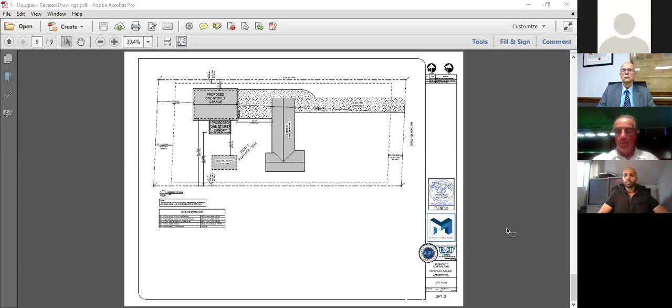Trevor Douglas: My address is 6644 Forestell Road, Guelph. My application is for a shop to be built in the rear corner of my property. I need a variance on the height of the roof to 9 meters as opposed to 5. The reason for this is I've got an RV that's 11 or 12 feet tall, so I need the extra height to park it inside, and that's why I need the variance.

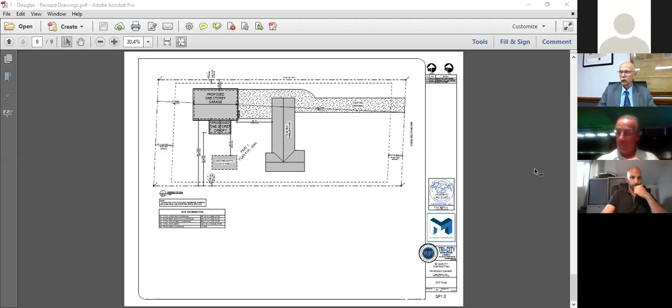Okay, I'll ask members of the public. Lena, are there any registrants who requested to speak? No, I did not receive any requests. Then I'll ask Courtney, would you please advise if there are any attendees watching the hearing who would like to provide comments or ask questions with respect to the application? There's no attendees present looking to speak. Great, thank you. So we'll now turn it over to the committee.

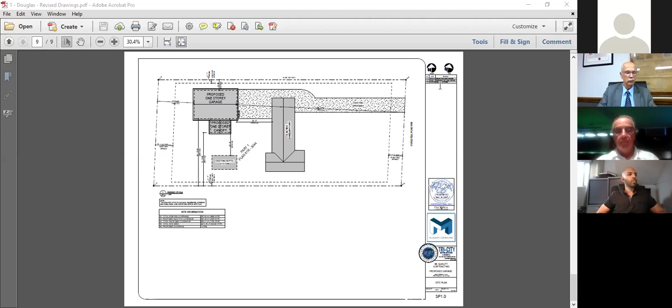I'll ask each committee member in turn with respect to any questions or comments they may have of the applicant or the county planner. Dan? No, I'm fine with this, John.

Okay, Dennis? Just the height, that seems like a lot more than 11 feet that we're adding there. Is that the minimum you go? Yeah, I've got a 16-foot interior ceiling for a 14-foot garage door. I'm just going a little bigger because we do plan on buying a larger RV, like more of a diesel pusher in about 2 or 3 years, so I'm just sort of planning for that down the road. Right now I've got a C-class RV, but I will be upgrading in a few years, so I'm just sort of planning ahead.

Okay, thanks. Deep? Yes, I have a question regarding the canopy that's attached to the garage. Will that be connected to well or septic system for the water, for the bar, or no? No. There will be water run to it, yes. But just for a small hand wash sink. Oh, okay. Yeah, no, I'm good.

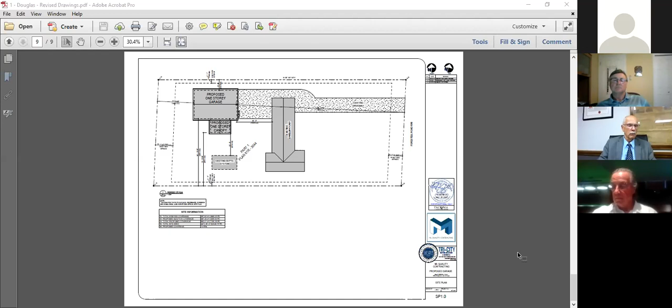I know, actually, one more question. Access to the garage, or sorry, the shop - will you be cutting any trees from the side of the driveway? No. Okay, that's it. Paul? Yeah, just with regards to Dennis's question on the height, Trevor, I was just looking at it, it comes to about 29 feet at the peak.

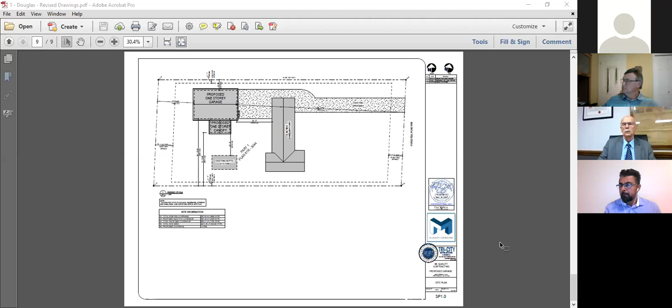Was there any thought process maybe for a different design to minimize that? Like, I guess your 12 feet was your RV now, what would the new RV be? The new one would probably be closer to 13 feet, and we're going to go with a 14-foot square door just for that reason. As for the design, I just sort of left this up to the engineer. We gave him some parameters size-wise for what we wanted with the width and length of the shop, and this is what he recommended as per code. So we're just going based on his recommendations for height with the rise and run of the roof, if that makes sense.

Any other questions, Paul? Paul? John, sorry, I lost the connection there. I got cut off there. Okay, any other questions, Paul? Nope, that's it. Okay, did you hear my reasoning for that? I didn't know if I got cut off, if you heard me or not.

Yeah, actually I didn't hear. If you don't mind, just quickly going over that one more time. That'd be great. Yeah, like the engineer who drew this up, we just told him we gave him a footprint of the shop, 40 by 60, and we told him we wanted a 16-foot interior ceiling. So this is what he drew based on building code. So we're just going with what he recommended. Okay.

Thank you. Thanks. Okay, I have one question. The concern is that this might be used in the future for commercial industrial use, and we're going to be asking you, as part of the conditions, to provide a letter confirming that there will not be any commercial industrial use of the structure. That's fine, that's not going to happen. It's just a shop for storage. Okay.

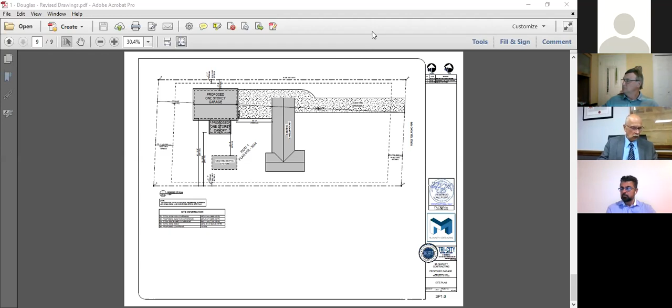In the matter of Section 45 of the Planning Act as amended, being a new comprehensive zoning bylaw 023-2018 as amended, an application for a minor variance permission to allow one requesting relief of comprehensive zoning bylaw 23-2018 as amended to permit a maximum height of an accessory structure to be 9.02 meters to the peak of the roof instead of 5 meters as required, requesting relief of comprehensive zoning bylaw 23-2018 as amended to permit a maximum lot coverage accessory structure to be 5.1 instead of 5% as required. So may I have a mover and a seconder for this wording?

Dennis? Moved. Second, Dan? So now we will vote on the application. As I call out your name, state either approved, denied, or deferred.

Dan? Approved. Dennis? Approved. Deep? Approved. Paul? Approved. Approved, and I vote approved as well.

So Lena, we don't have to read the final vote. It's all approved. So let's move to the second minor variance application. For the information of the applicant, it's approved subject to a 20-day appeal period.

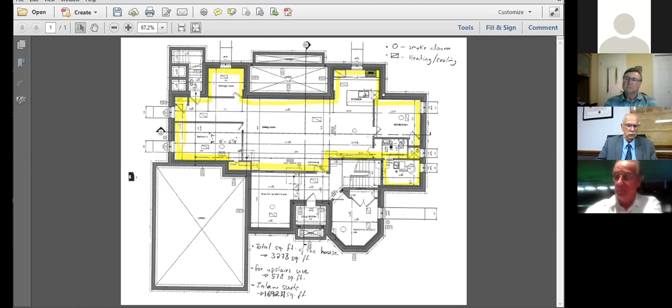I'm okay with it right now. Deep? I'm good with this as well. Paul? I'm also okay. Okay, I just have a question. Has this been constructed already and the building department has gone through it, or are you waiting for a minor variance before you make the application to the building department?

The house has been built, but the basement is all open. So I'm waiting for the variance in order to start construction of the basement, putting in the walls and everything. Okay, so the question is, have these drawings been forwarded to the building department for approval? From what I was told, I have to wait for the variance. So the initial drawings have been approved, yes. When I was building the house, they had approved the blueprints. The house is about 2 years old.

Now, in regards to the basement, for the basement apartment, they are not approved, because they had to wait for the variance to go through before I can apply for the permit. Okay, if that's what your question is. Yeah, that's my question. So what I would propose is that we put a condition on the minor variance that's subject to receiving a building permit for the facility.

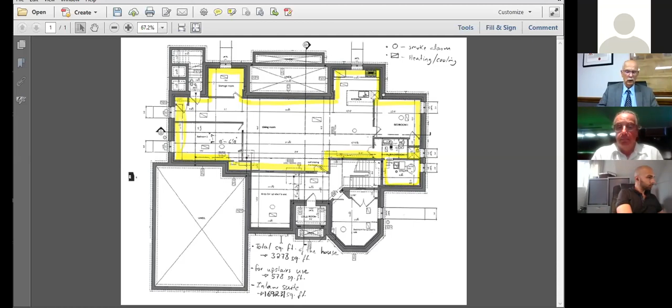Any other members of the committee have comments with respect to that suggested condition? I think that's fine, Mr. Chair, as long as I assume the building code would cover fire code. Yes, it would. The construction has to meet the regulations of the building code, and all the necessary points you raised would have to be covered off. Okay, great. Lynn, can you read the condition that we're proposing? The condition is that the minor variance would be subject to receiving a building permit for the construction of the basement. Okay, fair enough. All right, so what I'll do now is read the document.

In the matter of Section 45 of the Planning Act as amended, a new comprehensive zoning bylaw number 23-2018 as amended, and an application for a variance requesting relief from provisions of comprehensive zoning bylaw 23-2018 as amended to permit a maximum floor area of 52% as required. It's approved with the condition that the construction receives the necessary building permit.

So do I have a mover and a seconder to accept this wording? Yes. Paul? Mover, second. Deep? So I'll call your names and please indicate whether you approve, deny, or defer. Dan? Approve. Dennis? Approve. Deep? Approved. Paul? Paul? Approve. Okay, and I approve as well.

So Roman, this will be subject to a 20-day appeal period. Okay, great. So that's it for the minor variance applications. So the next item is item 5, other matters. We have no item 5. The next is adjournment of the Committee of Adjustment at 7:23.

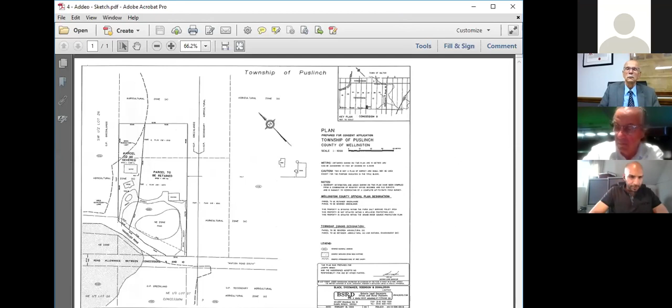We were working with the Grand River Conservation Authority and the county as there was a requirement to provide an environmental report because of the natural heritage features across the road and the regulated area to the north of the property. We've provided that information to the Conservation Authority and they are supportive of the proposed severance. We also have one barn within the MDS calculated area, which we provided the farm data sheets to the county, and they're satisfied with the separation that's required.

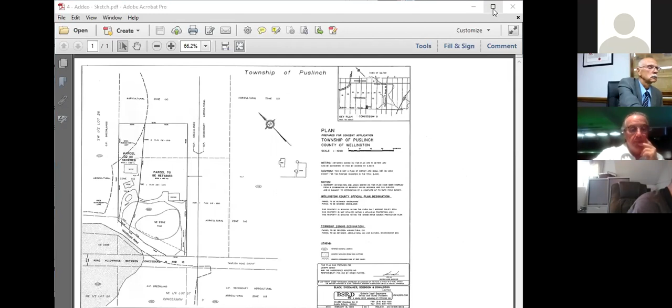Your road inspector has been to the site and has reviewed the proposed entrance, which we're showing at the southerly corner of the property. With the removal of a few trees and shrubs in that area, he's saying that access is acceptable. I'd be pleased to answer any questions.

Okay, then I'll ask, Lynn, were there any registrants to speak? No, we did not receive any. Lynn, were there also any agency comments received? The township did not receive any comments. Okay, very good.

Well, let's move into comments by members of the committee or questions. Dan? No, I've got nothing on this one. Dennis? Yeah, the minimum distance separation, you have an unoccupied barn, but it has the capacity to hold animals. So do you not need to fill out what the potential animal units are for that barn? It doesn't look like the MDS is done correctly.

Through you, Mr. Chairman, what the county has requested is that the owner of that barn fill out his farm data sheet, which shows the size of the facility. My understanding is the county does the calculation of the MDS based on the farm data sheet. In their comments to land division, which we received ahead of time because of the timing of this project and COVID, in response to not having Puslinch's response, they did prepare a report for land division, and they've said that the MDS 1 requirements are met with the proposed severance.

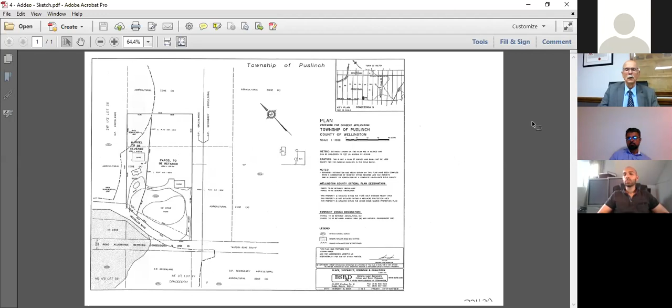Somewhat, but why does the building have to— like, he wants to keep that building as well as build his house as a storage facility? That's the rules that we have in place.

So the intent, my understanding of the intent, is that somebody might do the severance and just leave that building on their property and let it basically become a derelict building and not do anything about it. So there's a date put on when the building has to be either used or demolished, and once that's exceeded, you can always ask for an extension if you have mitigating circumstances. But certainly, we do not want any buildings that would become derelict and staying on the severed piece.

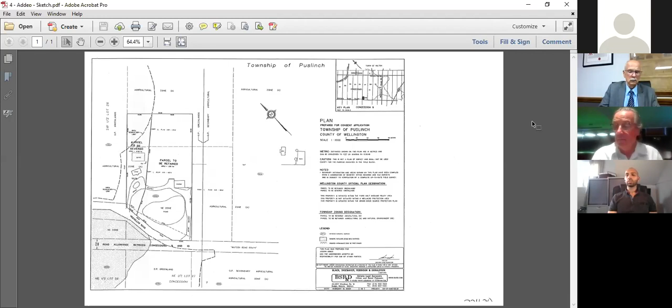Okay, so what I heard you say is that building can continue to be there as long as he's building a house or redeveloping that building as part of his house. As long as the house is there, he doesn't necessarily have to demolish it, but he has to build a house. Correct. The intent is not to have the property vacant and have a building there that's not fit for purpose of a residential home, and then it just goes to waste. Okay, I understand. Thank you.

So I assume, Nancy, if you want, you can contact Lynn and she can give you a copy of the agreement. You can advise your client appropriately. Thank you. Okay, so what I've heard is a suggestion that the committee has...

MDS calculations should be provided. There was concern about the GRCA by several committee members, and I'll just say that conditions to be subject to meeting GRCA requirements. And thirdly, notice that the retained parcel will require a minor variance.

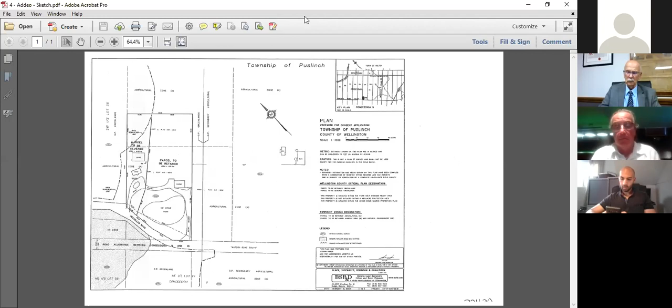Okay, great. So do I have a mover and a seconder for these suggested comments?

Dan, moved. Second, Dennis. Great, and we'll go around the table.

Dan? Approve. Dennis? Approved. Deep? Approved. Paul? Approved. And I approve as well.

Thank you. Moving on to severance application 12B, B27-20, also known as D10-HAR, George and Dorothy Harris, Part Lot 27, Concession 1, Puslinch. Proposed severance is 45.2 meter frontage by 148 meters or 0.66 hectares, existing and proposed rural residential use with existing house, detached garage, Quonset hut, swimming pool, and storage building. Retained parcel is 12.3 hectares with 19.3 meter frontage, existing vacant land with tile field for proposed rural residential use.

Lynn, are there any agency comments? If so, could you please read them? No, we did not receive any comments from the agencies or township departments.

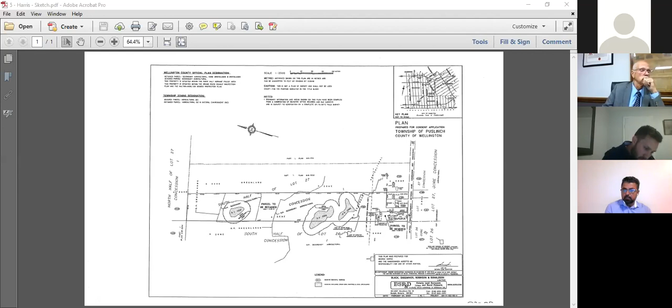I expect it will be down towards where the Quonset hut is.

Does my arrow show up on your screen? No. Okay, so there's the house and the pool, and then in behind is a Quonset hut, and I expect it will be in that area.

But in saying that, it's actually the GRCA saying they have no regulations in this area, and it's the Hamilton Conservation Authority that does, so I had to go back and forth between these two authorities, because while our mapping shows one thing, the GRCA claims they have no concerns in this area. So then we ended up at the Hamilton Conservation Authority, and they indicated they didn't have any jurisdiction here either. So both of them said they didn't have any concerns with the application.

Okay. Yeah, my concern was only with the GRCA and the regulations.

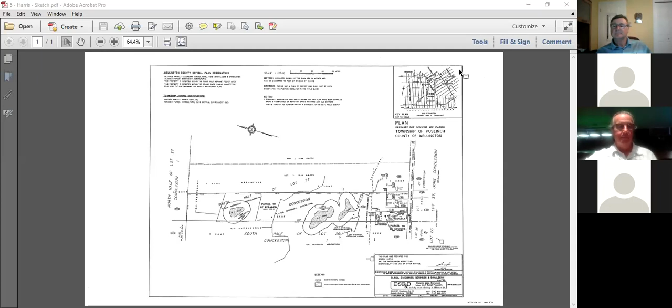Anything else, Deep? No. Paul? Did we lose Paul again? Paul? He might have got kicked out. I don't see him on the list. Oh, there he's coming back in. Hi, Paul. Paul? Yeah. Paul, perhaps maybe you can kill your video, that would take up less bandwidth. You might not lose us when you wish to speak. Sure, sorry about that, guys.

So Paul, I'm going around the table asking if anybody has questions. I don't know if you heard Dan Kennedy's question with respect to the tile and the response that it will have to be relocated from the future driveway location. Dennis asked with respect to the MDS calculations, and I asked Zach, our planner, and he indicated they'll see if they can provide it in the future. And Deep asked with respect to GRCA, and Nancy advised that neither Hamilton nor the GRCA are saying they have jurisdiction in this area, but somebody obviously has to because of wetlands and the natural zone. But they'll come out, I'm sure, down at the Land Division Committee. So Paul, do you have any questions?

No, I do not. Thank you.

Okay, Nancy, first of all, we're going to require a minor variance for the width of the frontage on the road. My concern is with respect to the location of the house relative to the other two homes and the future, whoever the future owner is, of the home that's going to be severed. Has there been any discussions with the homeowners of the other two homes?

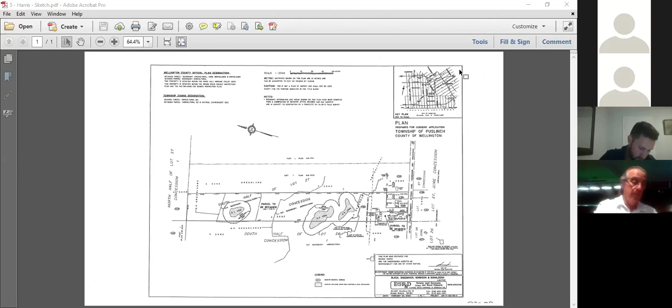No, at this point, the two that have been carved off previously, that's correct. I don't believe, actually, I shouldn't say that. I know that at one point Mr. Harris approached the adjacent owners to see if they wanted any additional lands to the rear of their lots, and they indicated they weren't interested. That's probably the only conversation other than him advising them that he is doing this severance. Okay.

Gentlemen, I'm going to suggest that we ask the county to allow us to have the minor variance first. I'm concerned that they may approve the severance, it comes back here for a minor variance, and we're into everybody coming out and objecting to this. So I would rather we request that the item be deferred and a minor variance be requested. Have your thoughts on this, members?

So I'll go around the table. Dan, any thoughts? I think that makes sense, Mr. Chair. Dennis? I would support that, maybe we can get the MDS at the same time. Yes. Steve? Yes, I agree with you. Paul? Yes, support.

Okay, so what we'll do, Lynn, is have a condition that we request that the severance be discussed for approval once the minor variance has been received.

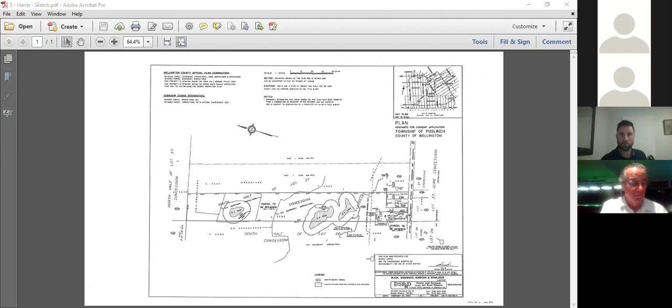Okay, so do you want me to read out the conditions that I have? Correct. We have our standard two regarding financial requirements of the township and also an approved entrance permit. Then I have that the owner apply for and receive a minor variance for the lands to be retained for the reduced lot frontage prior to approval of the severance. Confirmation that the MDS calculations provided are correct and subject to requirements of the appropriate conservation authority being met. Okay, I can change that. And then we request that this matter be deferred until the minor variance is approved.

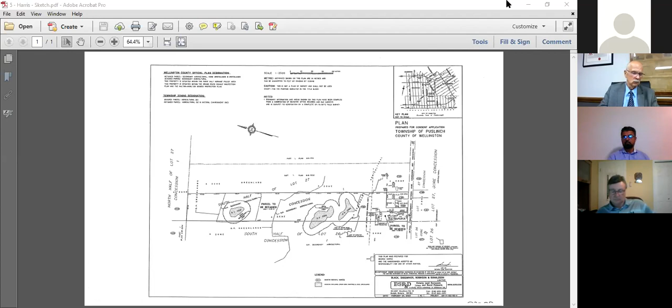So can you just read the last clause out, the minor variance clause for the committee members? I have the one about the minor variance, and then confirmation that the appropriate conservation authority requirements are met and that the severance application be deferred until the minor variance is completed. Okay, great. Thank you.

You're welcome. Do I have a mover and a seconder? Deep moved, seconded by Dennis. So we'll go around the table with respect to approving the comments for submission to the Land Division Committee. Dan? I approve the comments. Dennis? I approve the comments. Deep? Approved. Paul? I approve. And I approve as well. Thank you.

So we'll move on to 12C, Severance Application B72-19, also known as D10/ING, Gary Ingersta and Stacy Call, part lots 29 and 30, concession 1, 7258, concession 1, Puslinch. Proposed severance is 2.357 hectares with 144.5 meter frontage, vacant land for proposed rural residential use. See additional lot line adjustment B30-20. Retained parcel is 20.3 hectares with a 192 meter frontage on concession road 7 and 304 meter frontage on concession road 1. Existing proposed agriculture use of existing dwelling and shed.

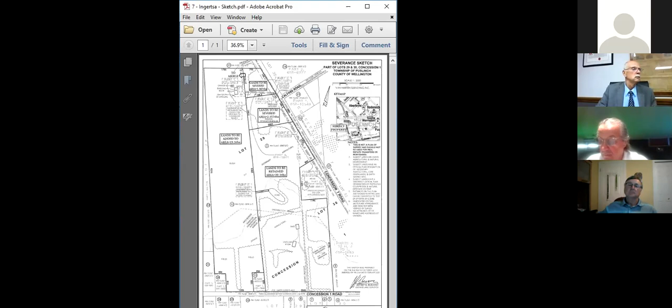The very top section there talks about, there's 2 spots that say lands to be severed. The first one, lands to be severed, is the top part of 1.387 hectares, and that's going to be merged with the parcel to the left. The second severance is the one that was originally before this committee. Those 2 chunks were originally one bigger chunk of around 2.7, 2.8 hectares. And the committee approved it, or supported the application at that time, even though it was quite large, due to the whole nature of the property.

Below the southern line of the second severance at 200 meters, that's all bush, right to the property that fronts on concession 1 road. So this pocket of land is kind of like an isolated piece all by itself. It doesn't make sense to keep it with the rest of the property that fronts on concession 7. So the committee did support this larger severance.

It went to the Land Division Committee, and just before the hearing, there came an agreement or arrangement with the property on the left side there, the lands to be added to, and our client Gary, that they decided to transfer the top chunk of 1.387 to the property to the left. Now that is the next application.

So if I'm going to focus just on the first application, all we can say is it's just gotten smaller since the first time we were at the committee. All in all, this change to have a lot line adjustment to add to the property to the left is a good thing. It makes the new severance smaller. And I'll talk about that lot line adjustment when we bring on the next agenda item.

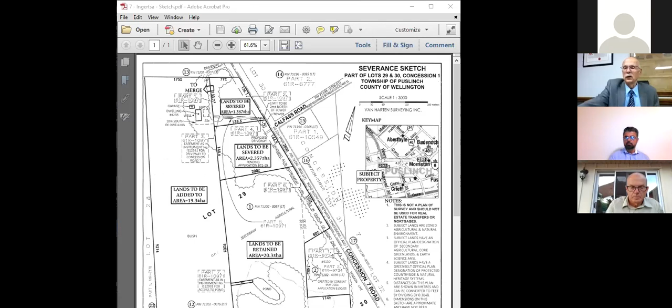Fair enough. Okay, so I'll ask for a mover and a seconder to approve these comments for furtherance to the Land Division Committee. So we have a mover. Dennis, second? I see Deep, but I can't see anybody else. Oh, there we go, Deep and Dan. Fair enough for second. So we'll go around the table. Dan? I approve. Dennis? I approve. Deep? I approve. Paul? I approve. And I approve as well.

So move on to 12D, lot line adjustment application B30-20, also known as D10/ING, Gary Ingersta and Stacy Call, part lots 29 and 30, concession 1, 7258 Concession 1, Puslinch. Proposed lot line adjustment is 1.387 hectares with 136.1 meter frontage. Vacant land to be added to an abutting agricultural parcel, William and Margaret Sims. Retained parcel is 20.3 hectares with 192 meter frontage on Concession Road 7 and 304 meter frontage on Concession Road 1. Existing and proposed agriculture use with existing dwelling and shed. Okay, Jeff? Thank you.

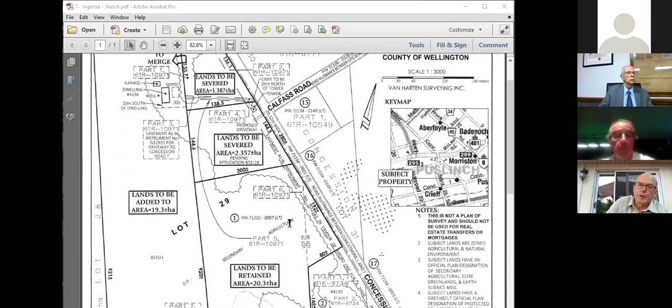Thank you, Mr. Chair. As mentioned briefly, we transfer the severance of 1.387 hectares and add it to the property to the left, that's Mr. Sims' property. If you roll down the screen just a touch, Courtney, if that's possible. So you can see right now, Mr. Sims, which is the property the lands are being added to, the driveway for that property actually goes to the north into parcel number 13 there. So it encroaches, that's right, it encroaches over the property line into the abutting parcel. That's existed for a long, long, long time. But the idea is to bring the driveway back onto Mr. Sims' parcel. By doing this lot line adjustment, a driveway can be constructed on the lands to be added. So the main purpose of this addition is to allow Mr. Sims to have a driveway on his own parcel.

Okay, so we'll go around the table. To his dwelling there, you can see some lines that talk about an easement that exists there right now. That's roughly where the new driveway will be, at least at the Concession 7 Road side. So if there's any questions, I'd be glad to answer them.

Dan? I think as long as they have safe access, I'm fine with this. Okay, Dennis? I'm okay with it. Deep? I'm okay as well. Paul? Also okay. Great, I don't have any comments either.

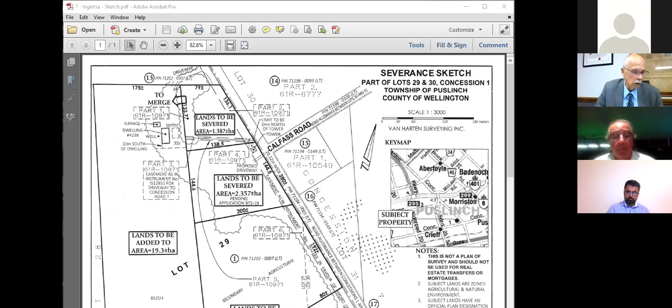So, Lynn, the conditions that we have: our standard two conditions that the owner satisfy the requirements of the Township of Puslinch financially, and that includes taxes are paid in full. And also that the owner obtained an approved entrance permit, verifying safe access to the property.

Great. Okay, so we'll have a mover and a seconder. Move, Dan, second, Dennis? Okay, we'll go around the table. Dan? I approve. Dennis? I approve. Deep? I approve. Paul? I approve. And I approve as well.

Okay, let's move on to 12E. Severance application B33-20, also known as D10/HOF, Janet Hofstra, Part Lot 128, Concession 4, 6931 Forestell Road, Puslinch. Proposed severance is 47 by 90 meters, or 0.42 hectares, vacant land for proposed rural residential use. Retained parcel of 7.7 hectares at 120-meter frontage. Existing proposed rural residential use with existing dwelling, pool, and tennis court.

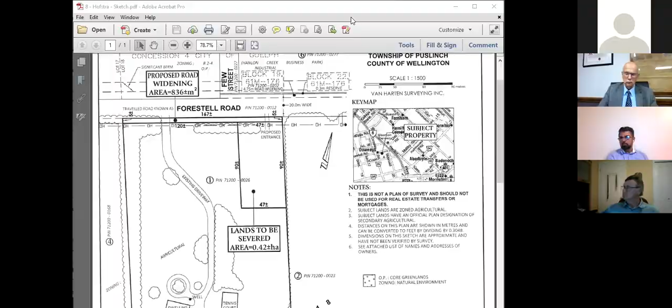Let's ask Lynn to read out the conditions. The conditions will be our standard 2: that the owner satisfy the requirements financially, that taxes are paid in full and the consent review and clearance fee is paid, and that the owner obtain an approved entrance permit verifying safe access and sight lines.

Okay, do you have a mover and a seconder for this? Moved by Deep, seconded by Dan. So we'll go around the table. Dan - I approve. Dennis - I approve. Deep - I approve. Paul - I approve. And I approve as well.

So let's move on to the next one. 12F, lot line adjustment application B37-20, also known as D10/DET, Ralph and Jennifer Dieter, part lots 1, 2, and 3, concession Gore, 6525 concession 1 and 6529 concession 1, Puslinch. Proposed lot line adjustment is 14 meters frontage by 76 meters, or 0.1 hectares, vacant land to be added to an abutting parcel for rural residential use, owned by Brendan, Rebecca, Hugh, and Janice McDonald. Retained parcel is 72.6 hectares with 520-meter frontage, existing and proposed agriculture and residential use, with existing dwelling, barn, drive shed, and shed.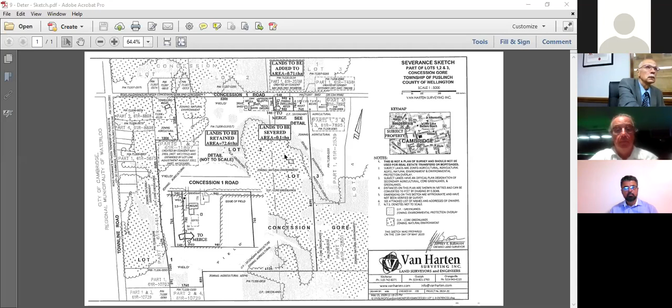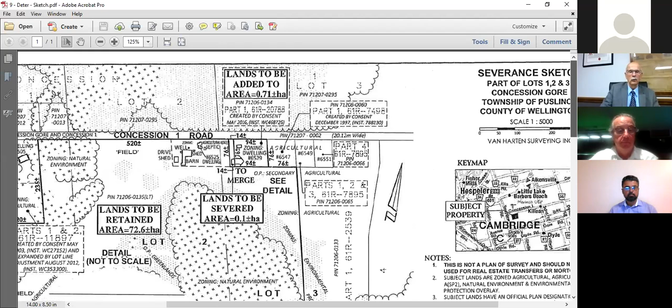So we're applying for a lot line adjustment. On the sketch, this is a really large property, so the action is happening at the top right of that drawing. We've presented a detail - if you could zoom towards that detail, more in the heart of the plan of the sketch, Courtney, that might help. Yeah, and then just raise the whole drawing up the other way. Keep going, keep going, bring it up. Perfect - oh no, it's flipped, go back to where you were. There you go, perfect, thank you, that's great. So you can see in that detail there, right where we're going to do the work.

We're going to take 14 meters and add it to this property that was created by consent back in 2016. The person who purchased 6529 made an addition to the property, and also added a turnaround spot for the driveway. That turnaround spot encroaches marginally over the property line. There's a shed really close to the property line too. To center this and give a little more space to this house, the idea is to add this 14 meters so the parcel gets a little bit bigger. That's the purpose of the application.

Okay, thank you. Dan, questions? No, nothing from me. Dennis? No, straightforward, thanks. Deep? No comments. Paul? Okay. Lynn, were there any agency comments on this one? No, I didn't receive any. Or staff comments? No staff comments either. Were there any written comments from the public?

No, I didn't receive any. Great, thank you. And Courtney, are there any members in the audience who would like to speak? We have no attendees at this time. Great, thank you. All right, so let's ask Lynn if you could summarize the comments.

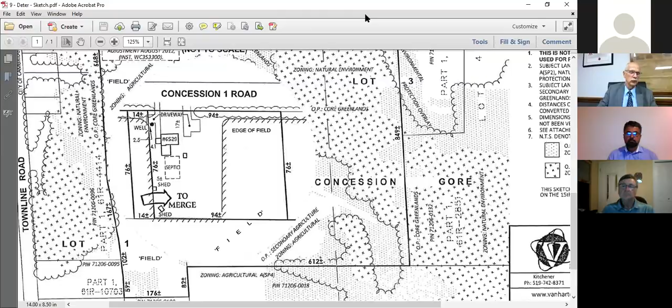So I just have the one condition, and that is that the owner satisfy the requirements of the township financially and otherwise, including taxes paid in full, and consent review and condition clearance fee. I believe there's already an entrance into that property that it's merging with. Yes, there is. So it would just be the one comment.

Great, thank you. I welcome a mover and a seconder for this comment. Dennis, second, Dan. We'll go around the table. Dan? Dennis? Approved. Deep? I approve. Paul? Approve. I approve as well.

Thank you. So that wraps up the severance applications under the land division. Other matters, we have none, but I'll go around the table in case anybody wants to bring something up. Dan, anything you'd like to bring up? No, I'm fine. Dennis? I'm good. Deep? No, I'm good. Paul?